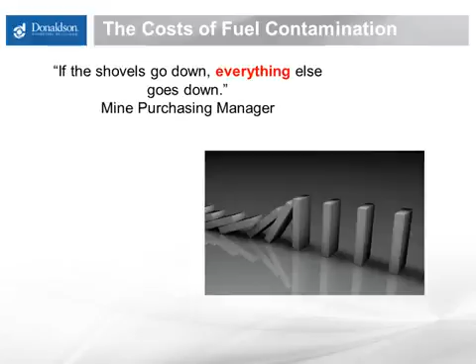Diesel is the lifeblood of many organizations. Without it, digging, hauling, planting, harvesting, powering, none of it is possible. Therefore, keeping diesel healthy is essential to operations. The range of hazards that can infect the integrity of diesel is diverse. Too often, however, customers do not understand this diversity or how it truly impacts the bottom line. Beyond the cost of ruined injectors, there are a host of other factors that need to be considered, and we want to explore these today.

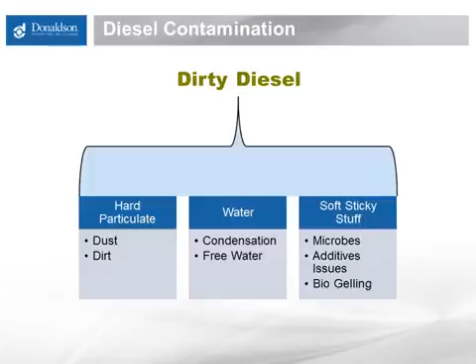For the purposes of today's webinar, we will focus on three categories of contamination. First would be hard particulate, dust and dirt. The second is water, and the third is soft particulate, which we refer to as soft, sticky stuff. And this is really a whole host of issues that we're going to deal with as a single category. But let's start out with dirt.

In many of the applications where diesel is consumed, dust and dirt are omnipresent. These substances are probably the first ones you picture when you think of contaminated fuel. Perhaps you've heard the phrase to dust an engine? Certainly most filters are designed with dirt as the foremost enemy.

I want to mention that in North America, fuel is not excessively dirty. We often hear, "It's the responsibility of my fuel supplier to bring me clean fuel." The good news is, most do. It's just the goalposts have been moved regarding how clean the fuel needs to be. Additionally, once the fuel is in your tank, it is your responsibility to keep it clean as it goes into your vehicle's fuel system.

Hard particulate causes several problems in the fuel system. Damage to moving parts leads to starting problems, poor engine performance, idling issues, and potentially complete engine failure. Also, the spray pattern generated by the high-pressure common rail injector is critical for proper combustion and overall fuel system performance. It must be extremely precise in terms of quantity, distribution, and timing.

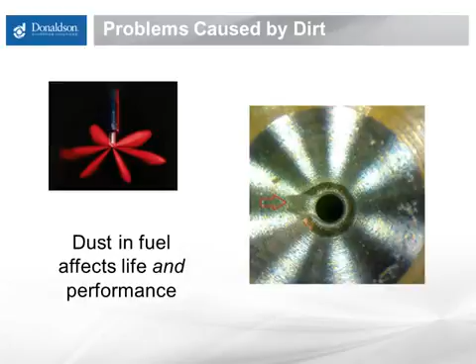Pump performance can also be compromised by scoring and abrasive wear. These issues are magnified by the tighter tolerances and extreme pressures in high-pressure common rail engines. In these circumstances, it's the smallest particles, 1 to 5 microns in size, that cause the most damage, virtually sandblasting part surfaces.

Calculating the cost of dirt on operations is going to be different from some of the other contaminants we talk about during this webinar. Dirt issues are likely the most catastrophic to equipment and impact operations, and they can have profound issues relating to warranty and total cost of ownership. According to David Barker of CAT, contaminated fuel can cause an unacceptable rate of injector wear and resultant failures, and as a result, unnecessary repair costs.

When calculating simply the cost of repairs, injectors are expensive. Up to $16,000 to change a set of injectors on a haul truck, $4,000 or $5,000 for pumps and injectors on a diesel pickup truck. But of course, these are not the only costs associated with ruined injectors. Loss of production, mechanic resources, disruption to other equipment, this all adds to these costs. One mine cited costs up to $150,000 per hour due to unplanned downtime.

But before the actual failure sets in, dollars are already flowing out of the till. As the spray pattern is altered, there's a fuel economy penalty. Consider, for a fleet consuming 10,000 gallons of fuel a day, just a 0.5% decrease in fuel economy can cost close to $55,000 per year. Now, I'm not trying to make the case that cleaner fuel will improve your fuel economy, but cleaner fuel will absolutely halt or slow the rate of decrease of your fuel economy. And this is an important point.

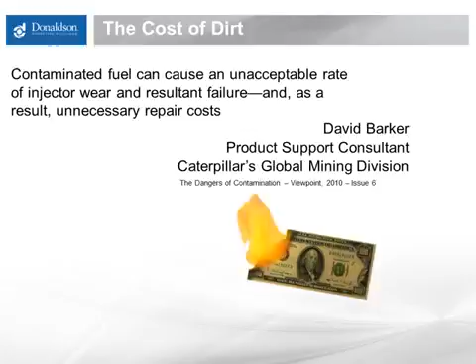So how have we gotten here? Only 10 years ago, particles in the 7 to 10 micron range were about as small as filters needed to worry about capturing. However, with high-pressure common rail engines, we are concerned with particles as small as 2 or 3 microns, and we need to keep as many of these particles out of the fuel system as possible.

This chart helps to show how the filter efficiency requirements have evolved. The blue line shows the filter efficiency of a typical filter found at the bulk storage tank. We often refer to these as maybe a 25 micron filter. And at 20 microns, this filter has an efficiency of about 96%, or it stops 96% of particles 20 microns in size. As the particles get smaller, the efficiency goes down, and at 3 and 4 microns, we have 40 or 50% efficiency.

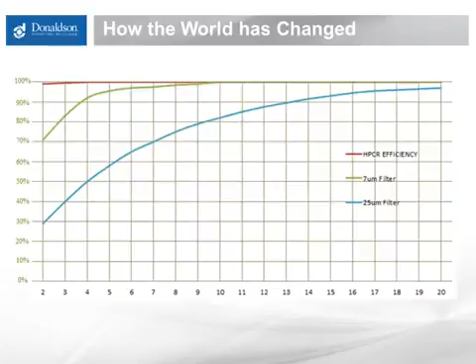Now in the past, fuel injectors could handle the very small particles, so fuel filters were designed to stop particles in the 7 to 10 micron range. The green line shows how the efficiency of these filters varies with particle size. 10 micron sized particles are stopped around 99% of the time. 3 micron sized particles are only stopped about 82% of the time.

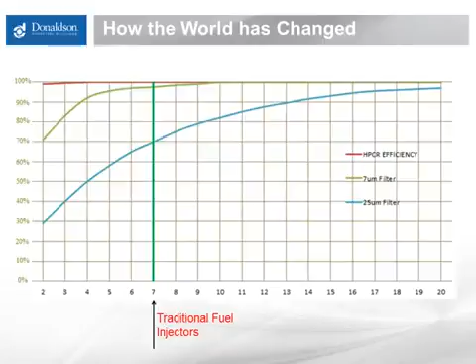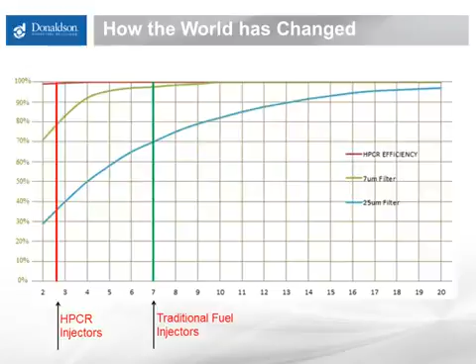With high pressure common rail injectors, we need to stop particles down to 2 or 3 microns in size. This means the filters need to be extremely efficient on even the smallest particles. As you can see with the red line, today's modern fuel filters need to stop just about everything, and it's worth noting that the vast majority of particles are small, smaller than 2, 3, 4 microns in size, so the filters have to capture more and more particulate.

Now, purely from a filtration standpoint, dirt is really the easiest contaminant to deal with. Filters are designed to deal with dirt and able to do it quite well. And historically, filters did not plug up due to dirt. They would go from maintenance period to maintenance period, being changed when convenient for operations.

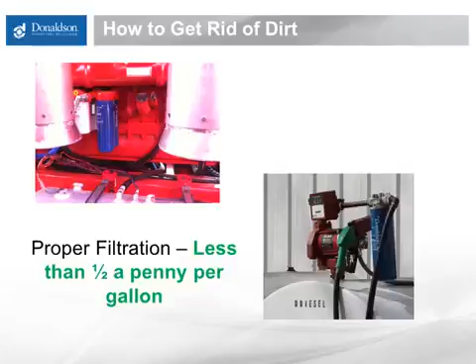More complex engines now require filters to capture smaller and smaller particles. And because there are so many more small particles than large ones, we now see filters plugging up before meeting desired service intervals. And this will increase costs, an extra $20 or $30 each time a filter needs to be changed. Proper filtration at the bulk storage tank will eliminate the vast majority of hard particulate related issues, and in most cases should cost less than 0.5 cents per gallon.

Water is the most vital substance on Earth, unless you happen to make your livelihood with a combustion engine. Then water can be quite the source of pain, seeping into underground tanks, appearing seemingly from nowhere when temperatures drop, eating away at vital components anytime it can. Simply put, water may be the most significant barrier in the struggle for the best fuel performance.

Water causes damage to both fuel tanks and engine parts. Rust and corrosion in the tank create hard particulate that is passed along in the fuel, causing engine wear. Component life is also shortened by, for example, abrasion. Water has lower viscosity than diesel, therefore providing less of a lubricating cushion between the opposing surfaces of the moving parts, and this leads to increased abrasive wear. Other things such as etching, pitting and cavitation, spalling, and even ice.

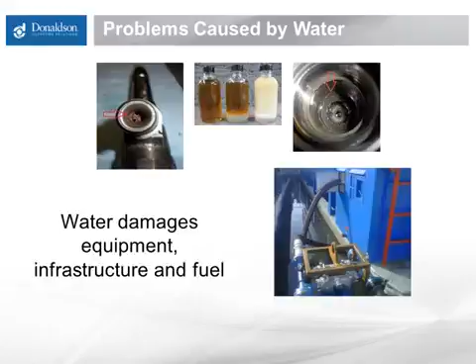Free water in fuel can freeze, causing ice crystals that behave just like any other hard particulate, plugging up filters, causing wear. And one of the challenges, of course, with ice is, by the time we get the equipment to the lab for our investigation, the ice is long gone.

Purely from a filtration standpoint, many of the costs associated with water in diesel fuel will be similar to what we discussed relating to dirt. Ruined injectors, ruined fuel pumps, water will devastate these components. In addition, water will wreak havoc on the infrastructure, corroding pipes and tanks. Really though, calculating the costs of water gets more complicated in a hurry.

Water is a catalyst for many of the problems we will discuss in the next section. Microbes, bugs, require water to live, thrive, and survive. Excessive water in fuel can cause additives to react in unexpected ways. There will be water in your diesel. However, minimizing the water above saturation point will really help you achieve more, not just through improved equipment life and performance, but by bringing down the number of fuel headaches you will experience.

Unfortunately, the advent of ultra-low sulfur diesel has made the fight against water more difficult. Traditionally, fuel water separators on board engines and coalescers at the bulk storage tank were used to prevent free water from reaching critical components. Frustratingly, these technologies do not work as well due to how ultra-low sulfur diesel interacts with the coalescing filter media. The sulfur in the fuel had purpose, including ensuring lubricity.

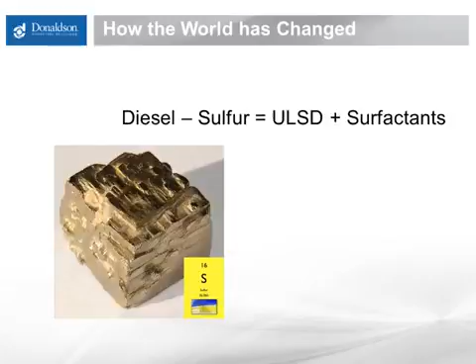When this sulfur was removed, it was replaced with surfactants. Unfortunately, these surfactants do not react the same way with the filter media, and water removal has suffered. We will cover this in more detail in our next webinar. However, for our purposes, the fact that coalescing is not as effective means we need to look at different methods for dealing with water. The fight against water is really about handling practices.

The best approach for dealing with water in diesel fuel in 2015 is to prevent the water, as far as possible, from reaching critical components. Donaldson recommends a two-tier strategy for accomplishing this. First, keep ambient moisture out of the tank through the use of a tank breather filter, such as shown in the filter on the left. These style filters can greatly reduce the amount of moisture introduced into the tank through the vent and will greatly reduce condensation. These systems can cost as little as $300 per tank and will need to be serviced periodically.

We also want to prevent free water, which is water above the fuel's natural saturation level, from passing into the equipment. Filters with absorbent media can take care of this. Filters such as this have a finite ability to hold water and will need to be serviced when plugged up.

And the more water that's in the fuel, the more filters it will take to keep the water out of vital equipment. Additionally, tanks should have a drain on the ideally slanted bottom to allow water to be drained from the fuel. Some companies with very large tanks will use floating suction to draw fuel from above instead of below. Again, our next webinar in April will deal with the complexities of removing water from diesel.

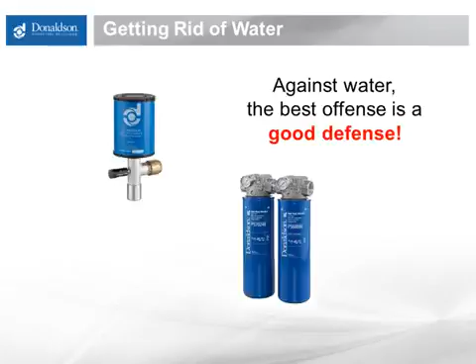After tackling dirt and water in the fuel, we need to deal with a category of contamination that is much more unpredictable. For the sake of brevity, it is to our advantage to lump a whole group of things into one category of soft, sticky stuff. And this would include such things as glycerin issues in bio, fuel additive issues, and microbial growth. Each of these is worthy of their own webinar, and these will be covered at a later date. But for today, we will treat them as a collective group due to the fact that, generally speaking, they cause similar sorts of problems to fuel systems.

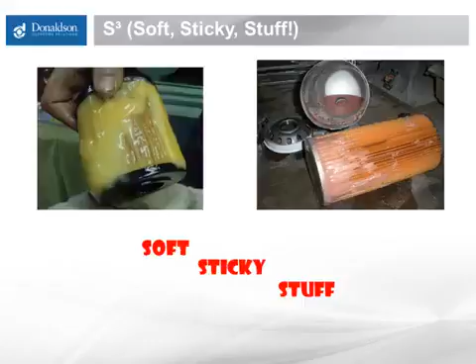One common symptom of soft, sticky stuff is a rapidly plugged filter. Filters either on a vehicle or at the bulk storage tank that are fully clogged in a very short period of time. This kind of plugging can have a significant impact on operations, as vehicles will be halted unexpectedly. Now, in some cases, it's very easy to see what is happening, and I've got some pictures here that show this. These filters were plugged up very, very rapidly with some sort of problem in the fuel, and it's obvious that nothing's going to get through them.

However, some filters that are experiencing these issues will not have any visible signs of plugging. In fact, it is often a good clue that a filter that still looks new is stopping some sort of additive problem from moving downstream. Filters that are plugged with dirt or other hard contaminant will have obvious signs such as black or other discolored filter media. But in the case of the filter shown here, the media still looks brand new, and it's because it was plugged with an additive issue in the fuel.

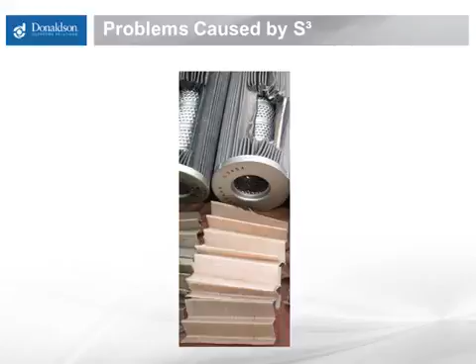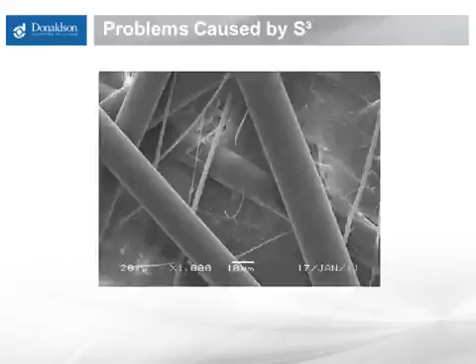Now, on a vehicle-by-vehicle basis, the cost of soft, sticky stuff is considerably less than the water and the dirt. Switch out the plugged filter and you're good to go, perhaps at less than $100 for a new filter and a mechanic's time. But unfortunately, life is not that simple. Rapid filter plugging is very contagious. Whereas dirt in the fuel might cause one vehicle to fail in an untimely manner, soft, sticky stuff can bring an entire fleet to a dead stop.

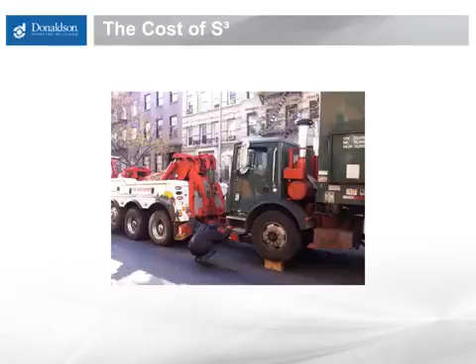Consider if you have a 10,000-gallon tank of fuel filling garbage trucks. One cold morning, that tank experiences some sort of fuel problem. One truck after another is stopped dead by the side of the road. Tows have to go out, mechanics get backed up, the garbage goes uncollected, and chaos quickly ensues. And the costs of this can quickly run into thousands and tens of thousands of dollars.

Changing fuel technology, as well as the evolving engine technology and corresponding filter efficiency changes, as discussed in the dirt section, have led to a significant increase in the incidences of rapidly plugged filters. There's a couple of reasons for this perfect storm. The higher efficiency requirements mean that, simply put, more is captured. Problems that in the past would have passed through are now being captured by the high efficiency filters. This includes both dirt as well as some of the issues we run into with additives.

Additionally, government mandated fuel changes have led to more biodiesel being used and many different additives being used to replace the characteristics of the sulfur. Again, there's many important reasons that these products are included in the diesel. However, like anything, in the wrong conditions, problems occur that can manifest themselves through rapid filter plugging.

It's important to remember, many fuel additives as well as properly blended biodiesel are not contaminants. And I want to stress it's not the intention of this webinar to make that claim. We reference in this slide a perfect storm, and for the end user and all of the companies supporting them, these are challenging times. And Donaldson is proud to partner with many companies, such as fuel suppliers, additive manufacturers, and others, to ensure that diesel users can weather this storm as well as possible.

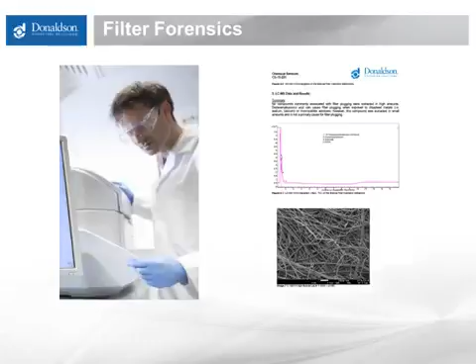Once the cause of the filter plugging is known, all of the vested parties can be a part of the solution. Filter suppliers, fuel suppliers, additive suppliers, maintenance, reliability, purchasing can all come together to get you running again. Whether it's $15,000 for a new set of injectors, a daily fine for missing a vital deadline, $30 for the next set of fuel filters, or half a cent a gallon for bulk filtration, without question, dirty diesel costs money. And in some cases, the cost of dirty diesel can't even be expressed monetarily.

Understanding these costs is an important part of designing a contamination control strategy. Understanding these costs reminds us how critical it is to accurately diagnose and address fuel issues when they occur. Business always involves cost trade-offs. We hope this webinar shines some light for you on the costs associated with dirty diesel, as well as some of the costs involved with cleaning diesel up. Burning the cleanest and driest possible diesel in your equipment will save money and ensure that you achieve more.